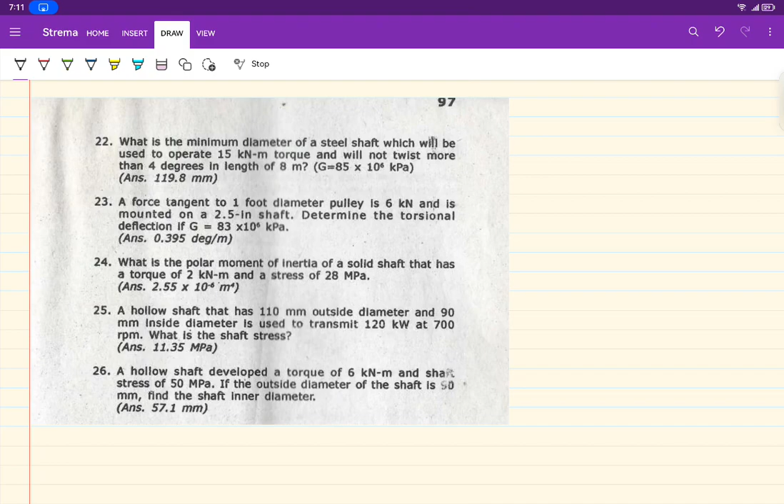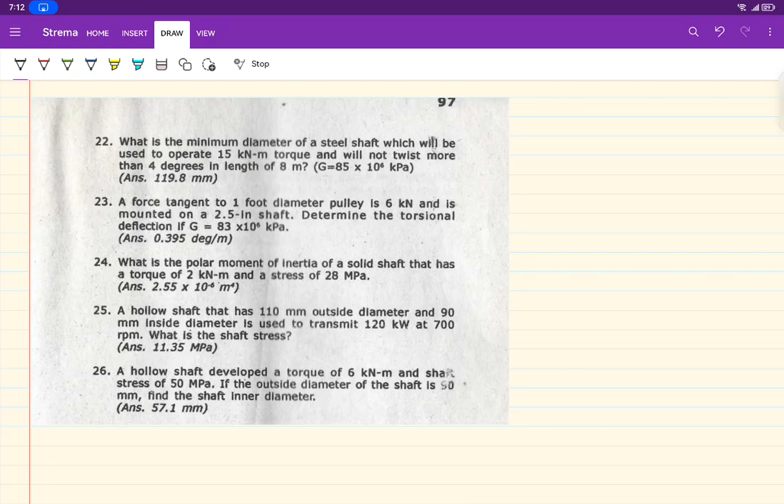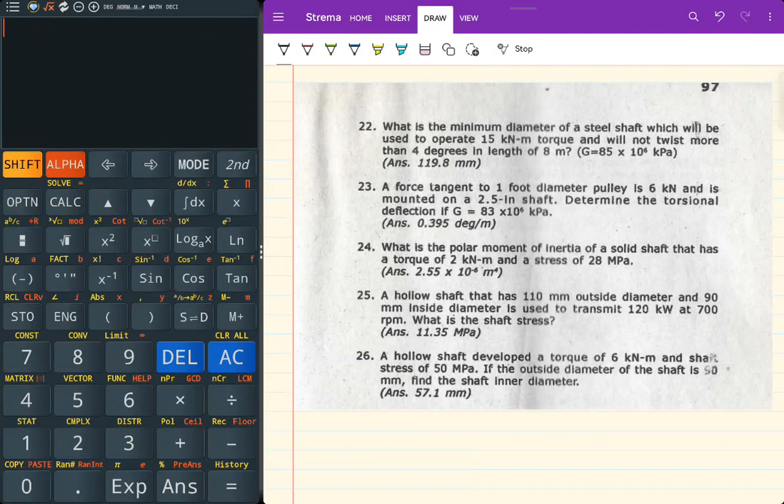So, second to the last part, for numbers 20 to 26. Ratsyada na tayo dyan. Okay? Open mo natin yung calculator. Then, let's go with problem. Sorry, let's go with problem number 22. Ayan. So, problem number 22. What is the minimum diameter?

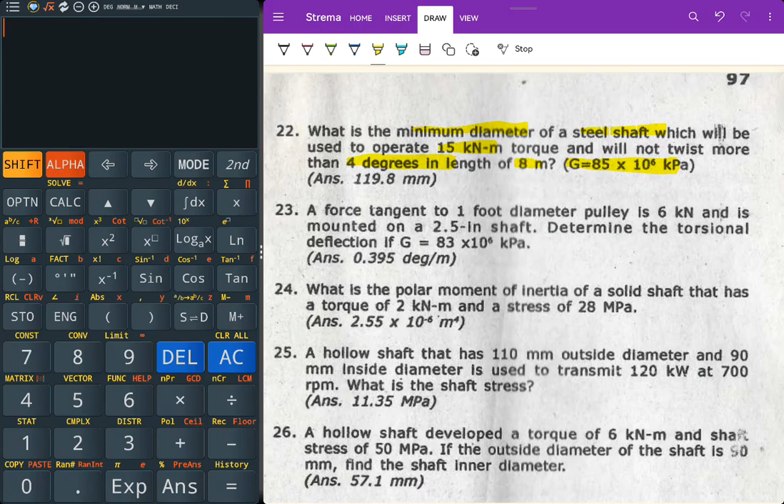Minimum diameter daw of a steel shaft, which will be used to operate 15 kilonewtons torque and will not twist more than 4 degrees in length of 8 meters. So, nagbigay ng G. Okay? So, naka-KPA, I think that is 85 GPa. Sige lang. So, wala ditong binigay na SS. Direktang formula to. Okay, for number 22.

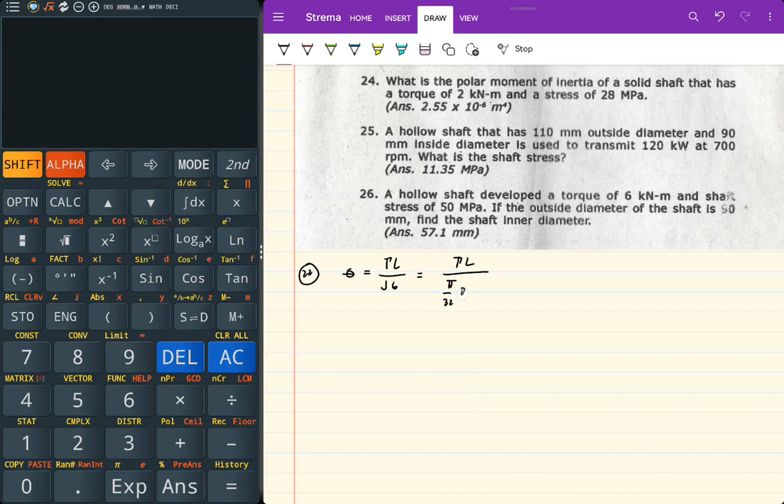Yung basic formula, theta equals TL over JG. Ang hinahanap, diameter. So, TL over pi divided by 32, D to the fourth, G. Ang kailangan ko ay D. So, theta equals 32 TL divided by pi D to the fourth G. Kailangan ko D to the fourth. D to the fourth equal to 32 torque L divided by pi theta G. Okay. Fourth root na.

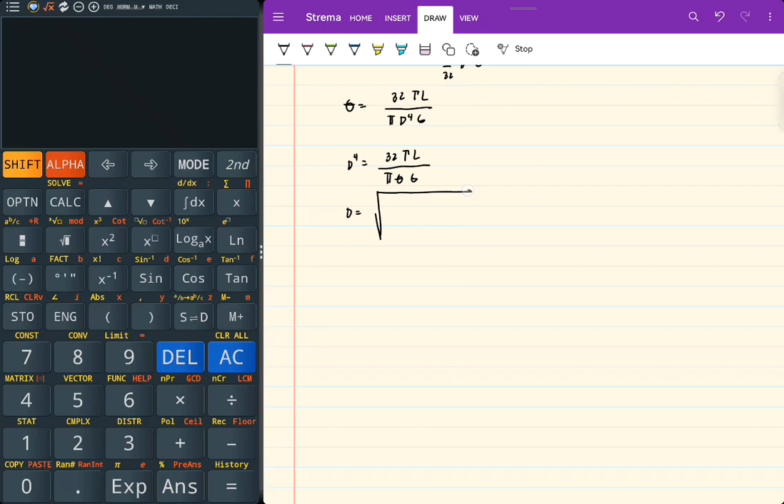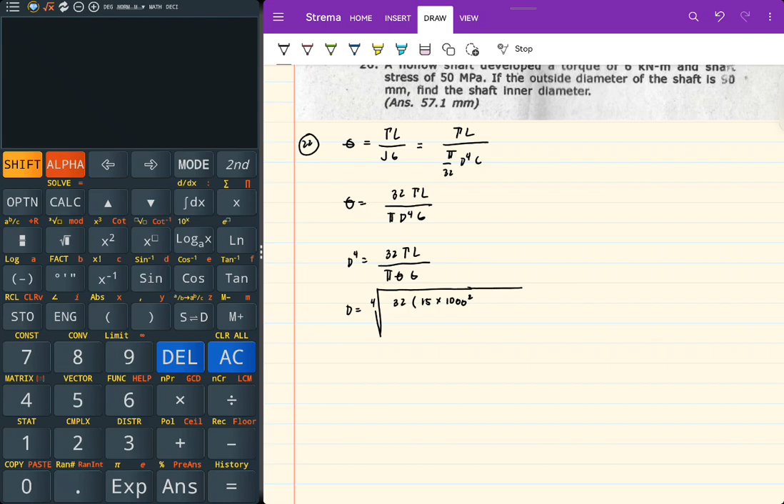D is equal to fourth root of 32 times the torque na kailangan naka-Newton millimeter. Okay. 15 kilonewton meter. Kailangan multiply ko ng 1,000 squared, kasi 1,000 newton per kilonewton and 1,000 mm per meter. So, 15 times 1,000 squared newton millimeter, kasi yun yung required unit ko pag nagsolve. And then the length, gawin ko ng millimeter. So, length mo is 8 meters. Gawin kong 8,000 mm.

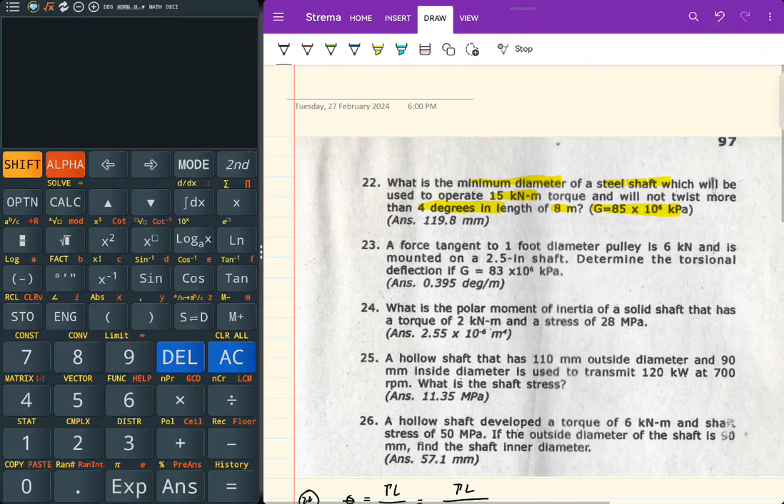Divide by pi times theta. Ano yung theta? That is 4 degrees. 4 degrees times pi divided by 180 degrees. G, 85 times 1,000 Newton per millimeter squared. Matitira ditong units are, let's cancel. So, Newton, Newton. Yung mm, matitira talaga yan. 4 pa, matitira. Si theta, theta. So, fourth root. Okay?

So, 32 times 15 times 1,000 squared times 8,000 divided by 4 pi squared. Dalawang pi. 4 times pi squared, divide by 180, times 85 times 1,000. So, the answer is 119.8 mm. Tingnan natin kung tama. Ay, tama pala. For number 22.

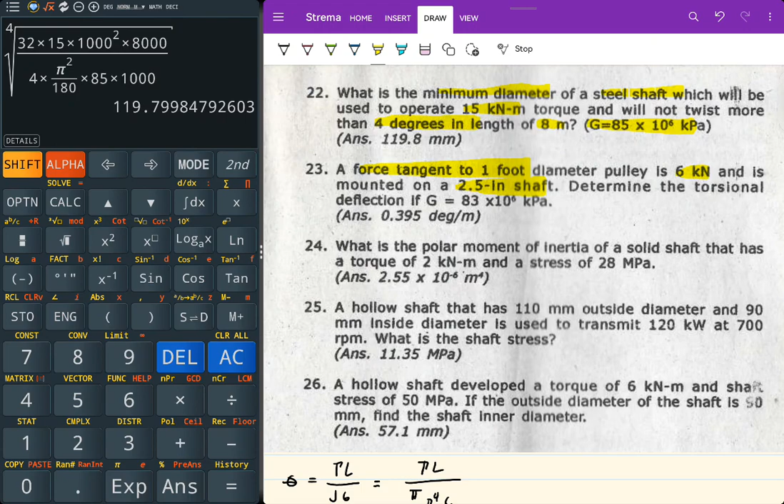Number 23. A force tangent to 1 foot diameter pulley is 6 kilonewton. I-drawing natin yung pulley. And is mounted on a 2.5 inch shaft. Determine the torsional deflection if G is that one. So, torque, meron tayong force. Okay. Ano ba ang torque? Define natin.

Recall that torque at number 23, torque is equal to force times diameter divided by 2. Diba? That is equal to force times radius. So, hanapin natin yung torque. Mas malaki yung torque kapag mas malaki yung diameter. Okay? Drawing natin para maalala nyo.

So, this is your pulley. Yung tangential force is ito. Bakit tinawag na tangential force? Kasi perpendicular dun sa center. Okay? Tangential force yan. Anywhere dun sa pulley, that is tangential. Equal yun. Okay? So, paano kaya ito i-solve?

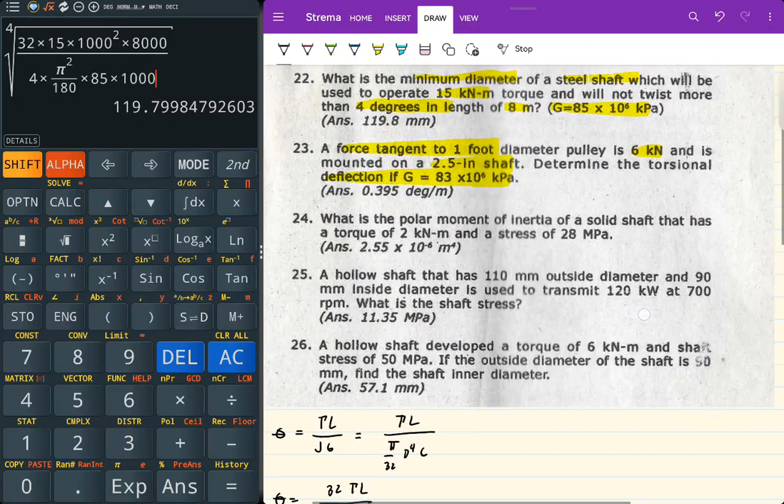1 foot diameter pulley is 6 kilonewtons and is mounted on a 2.5 inch shaft. Iniisip ko ngayon, paano kaya i-solve yan? So, ano ba yung tingin nyo na magkapareha sa kanya? So, dito muna tayo magsimula. Yun ang hindi natin alam. So, theta is equal to TL over JG. Hanapin mo yung torque. Torque is always equal throughout. Di bale kung anong malaki dyan, pulley or shaft, the torque is equal. Okay? So, kunin natin yung torque in here.

Torque is equal to the force tangential to the pulley or to the wheel that it is applied on, and it will be distributed to the shaft. Equal yung torque na yun. Remember, the torque is always equal to the hub, to the wheel, to the key. Remember niyo yun. Tinuturo ko dati yun. Sa pulley, sa hub, sa flywheel, equal yung torque na yun. So, what will happen? Anong hinahanap dyan? Deflection per foot length. Per length daw, per meter.

So, this will become theta divided by L equal to torque divided by JG. Torque divided by pi over 32 diameter ng shaft, kasi yun ang kukunan mo ng deflection. Hindi yung pulley, ha? Diameter ng shaft times G. Yung torque mo, that is force tangential times diameter ng pulley divide by 2. Divide by, akit ko na 32, pi ds to the fourth G. O meron na akong formula na I will work on.

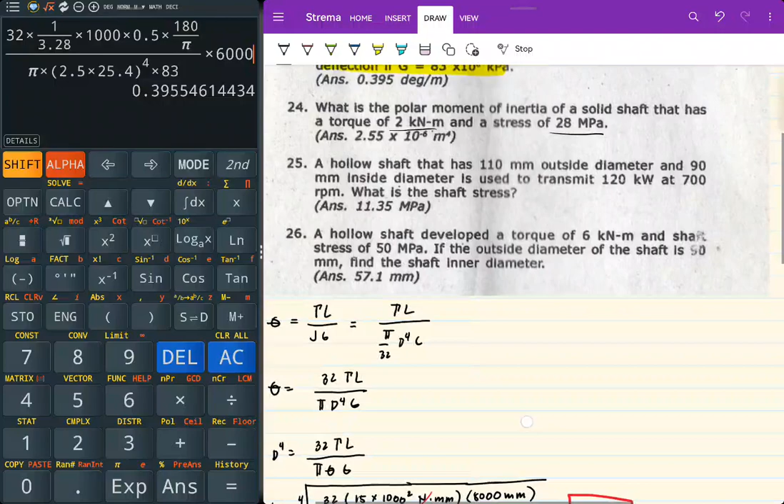Next problem, 24. Pasada na to. What is the polar moment? Oy, pag ganito ang binibigay ng problem, meron kang torque, meron ako stress. Diretso yan. Polar moment of inertia. So, himay-himay natin. May torque, may SS.

SS is equal to 16T over pi D cube. Yung polar moment of inertia is J. That is pi divided by 32 D to the fourth. Kukuhanin ko dito yung D to the fourth. Pasok ko in terms of D cube. Okay lang ba? D cube is equal to 16T over SS pi. Meron ba ako ditong D? Wala akong D. Kunin ko muna si D. So, D is equal to cube root ng 16T over SS pi.

So, D is equal to cube root ng 16. Ano yung torque ko dyan? Kailangan Newton millimeter ha? 2,000. 2 times 1,000 squared Newton millimeter. Yung aking SS, that is 28 MPa, 28 Newton every millimeter squared. Cancel mo si Newton. Diameter is cube root, 16 times 2 times 1,000 squared divide by 28. Store mo yung value niyan.

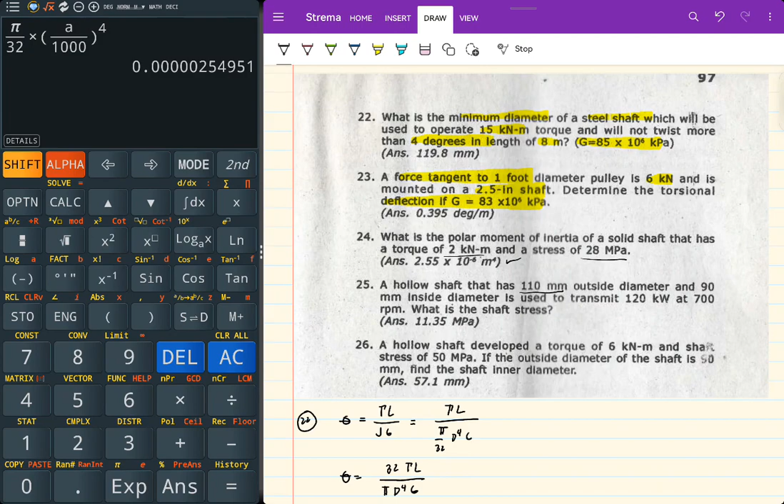Let's go with number 25. A hollow shaft has 110 mm outside diameter and 90 mm inside diameter, used to transmit 120 kilowatts, 700 RPM. What is the shaft stress? Kung binigyan ka ng power, kukunin mo muna yung torque. So, power is equal to T N divide by factor.

Binigyan ka ulit ng mga inside and outside diameter. Stress ang kinukuha. So, shaft stress is equal to 16T DO over pi DO to the 4th minus DI to the 4th. Kunin ko si torque dito. SS is equal to 16 times power times factor times DO divide by N pi DO to the 4th minus DI to the 4th.

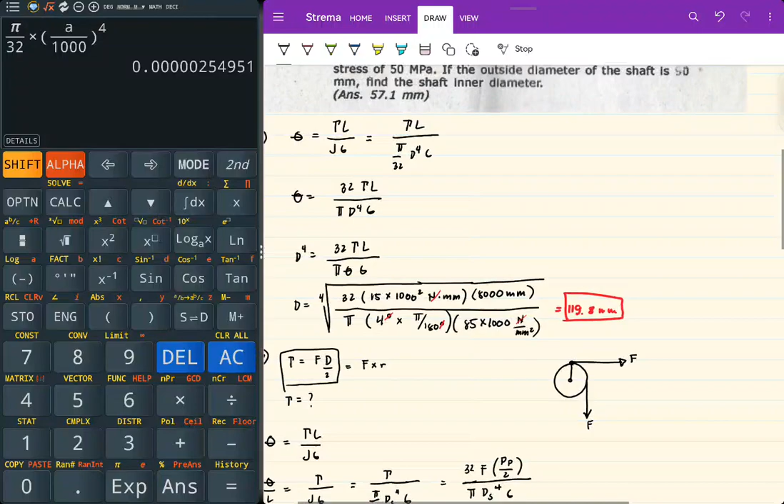SS is equal to 16. The power is 120 kilowatt times factor 9549000 Newton millimeter RPM every kilowatt, times DO. Our DO is mm na? Yes. 110 mm divide by 700 RPM. Pindutin na lang sa calculator para mabilis. Tapos 110 to the 4th minus 90 to the 4th, mm to the 4th. Cancel all same units.

So, mm magiging dalawa. Hindi maka-cancel yung Newton. RPM pala. RPM, kilowatt, kilowatt. So, the answer is 16 times 120 times 9549000 times 110, divide by 700 pi times 110 raised to the 4th power minus 90 raised to the 4th power. The answer is 11.34, 11.35 na lang natin. MPa. Basic again.

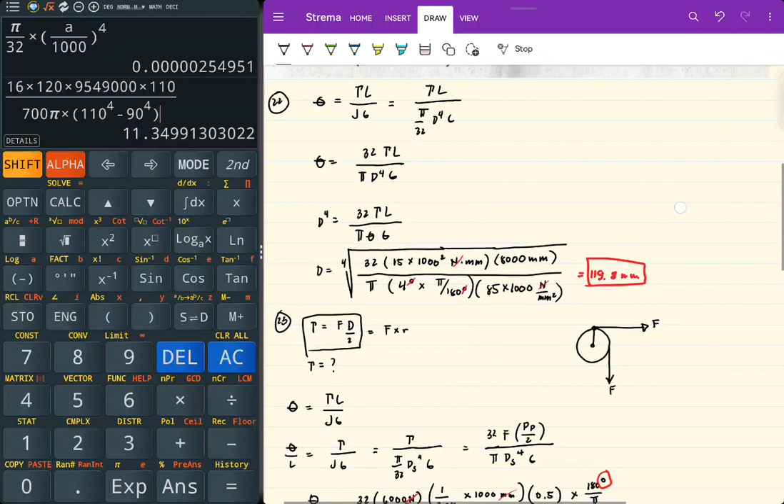Last one. So, ang kinukuha naman dito, inner diameter. Develop a torque and a shaft stress. Number 26. Meron kang binigay na stress, 16T DO divide by pi DO to the 4th minus DI to the 4th. Yung shaft inner diameter. 50 tapos 6. Reform ko muna. DO to the fourth minus DI to the fourth equal to 16T DO divide by pi SS. DI to the fourth equal to DO to the fourth minus 16T DO divide by pi SS. Fourth root.

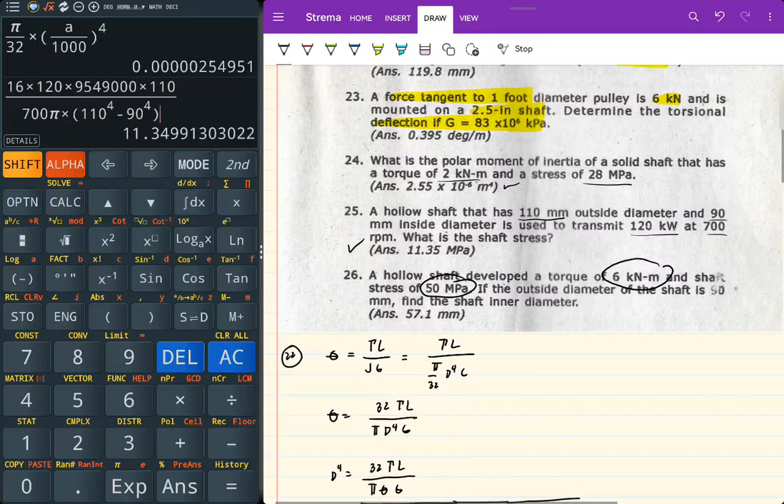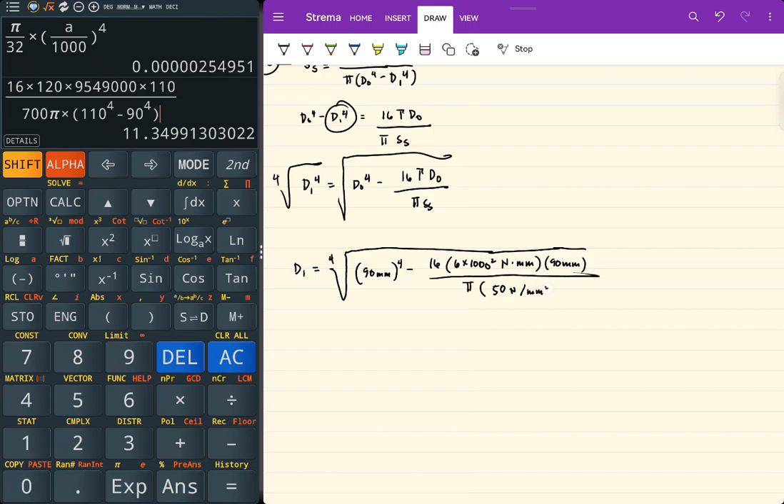So, DI is equal to fourth root. Ano ba yung DO natin? Is 90 mm. 90 mm to the fourth minus 16, 6 kilonewton meter, that is 6 times 1,000 squared Newton millimeter, tapos DO 90 mm divide by pi times 50 MPa, 50 Newton per millimeter squared. Cancel lang si Newton, angat si mm.

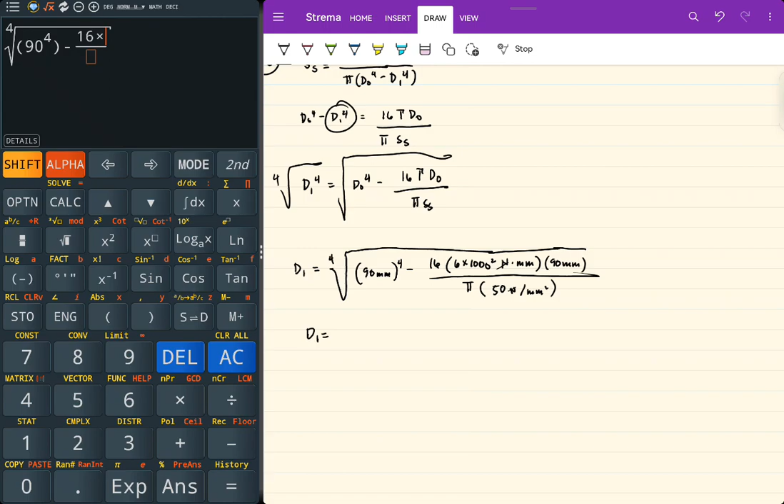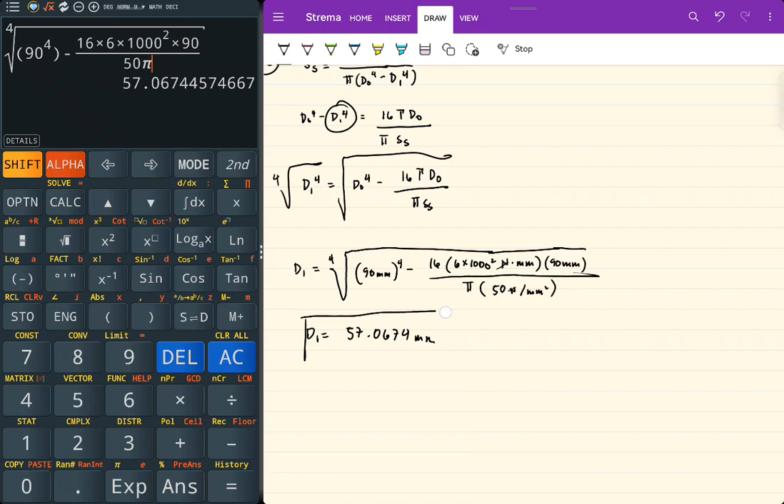Therefore, DI is equal to fourth root. So this is 90 raised to the fourth power minus 16 times 6 times 1,000 squared times 90 divide by 50 pi. So this is 57.0674 mm. Basic solving.